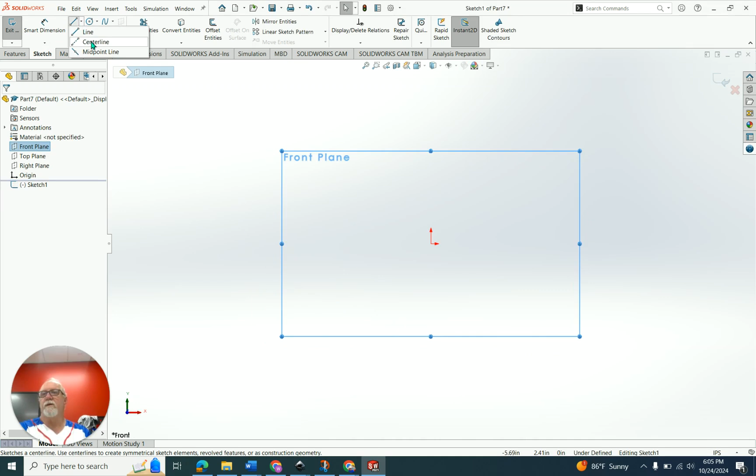I'm going to choose the corner rectangle and draw a box. I'm going to dimension my box to 3 inches by 3 inches.

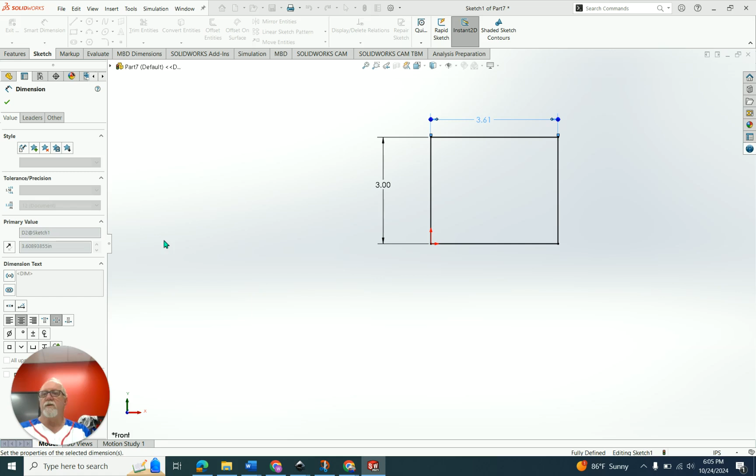One thing I would also like to do is make sure the box is composed of construction lines. So I'm going to select all the lines and choose 'for construction.' Now I have a reference for scale and size.

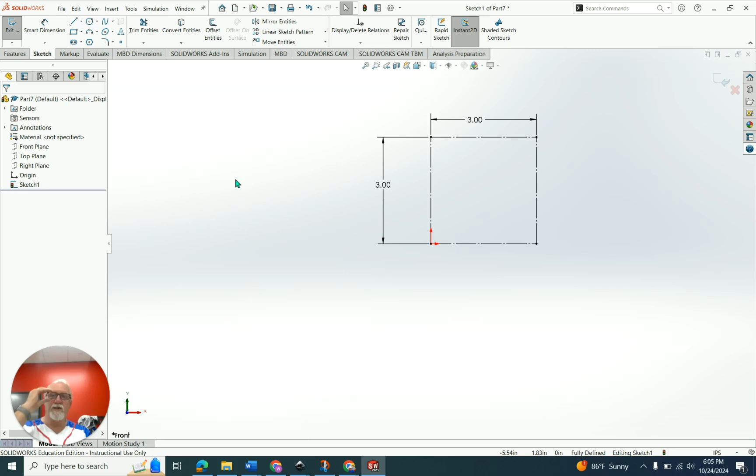I want my object to be 3 by 3. I go to Google and search for the Green Lantern logo.

I'm then going to use the Snip and Sketch tool from my computer. I'm going to choose New, then drag a box around my Green Lantern logo, and save it.

I'll remember the location. I'm saving it to the desktop right now, so I'm going to save it as Green Lantern JPEG. I'm going to go back to SolidWorks.

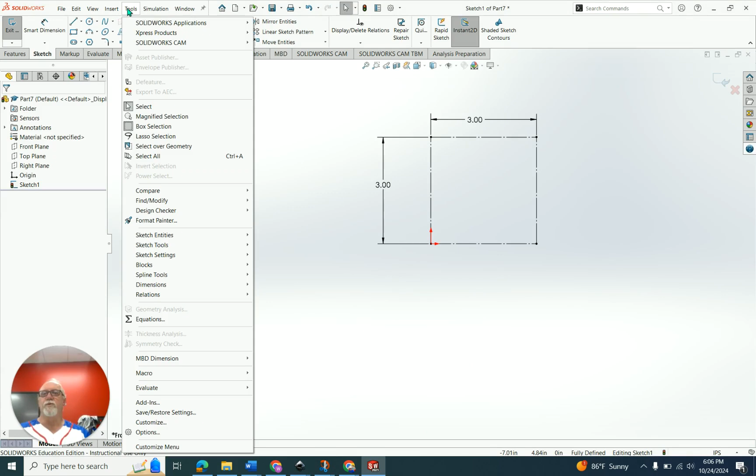I'm going to go to Tools, Sketch Tools, and Sketch Picture.

I'm going to navigate to my desktop, choose my Green Lantern logo, and click Open.

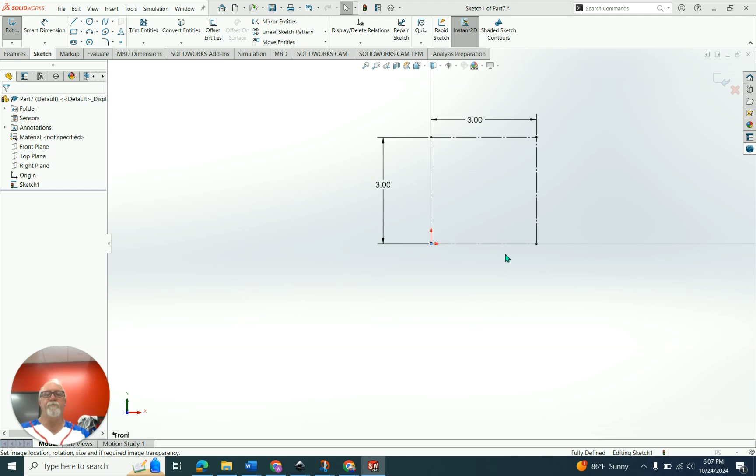It's going to open a large size scale view of it. I want to go to the property window on the left and choose Disable the Scale tool.

I'm going to drag my image down, make it smaller, and zoom in. I want to try to center that in my box.

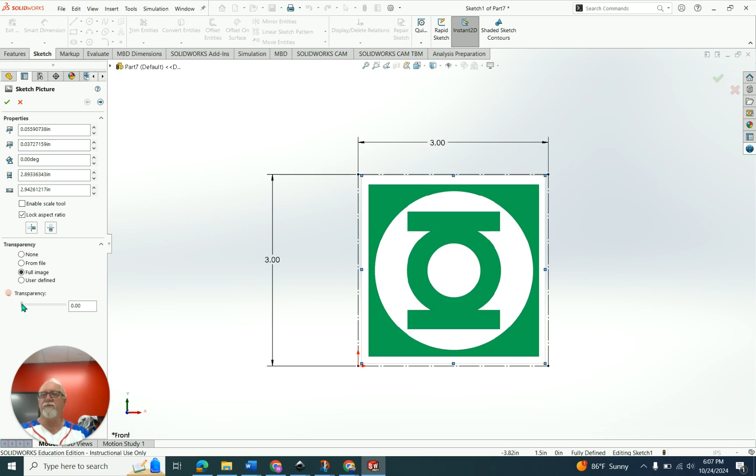I'm going to go to full image on the left and change the transparency to about 80% so I can still see it, but my lines won't be too dark to tell which ones they are.

I'm going to now close the sketch picture, and now I'm going to start to draw my sketch over my picture. There's my first circle.

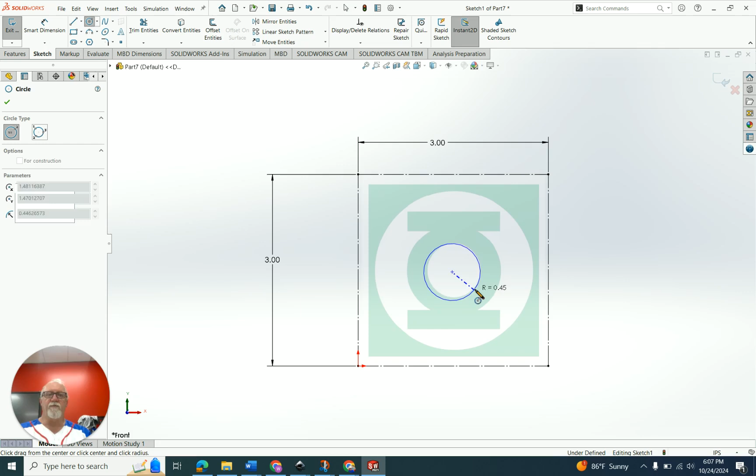The middle object, I'm going to turn and use this circle for that object. Then I'm going to have my outer circle image.

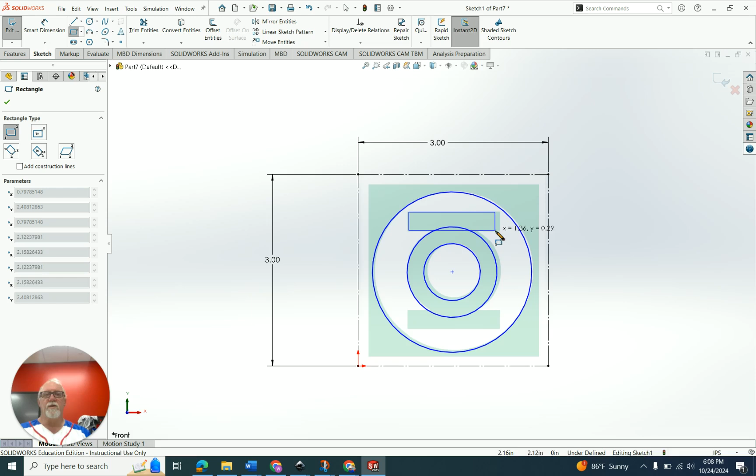Then I'm going to choose the rectangle tool. I'm going to draw a rectangle across there, and draw a rectangle across the bottom.

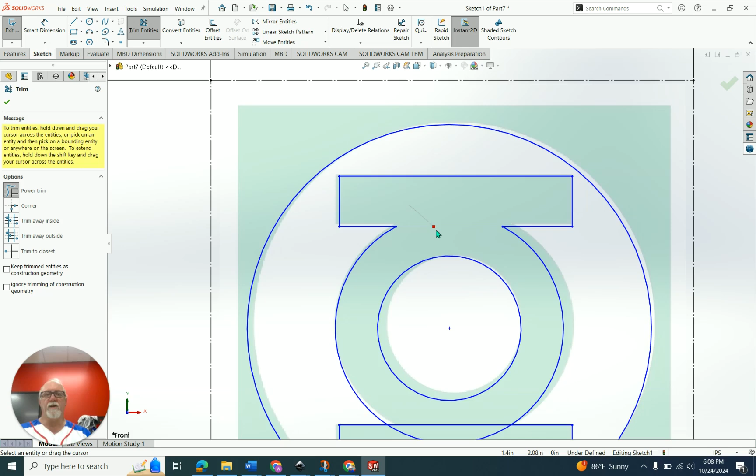I'm not going to worry about the outside green logo portion because I'm not going to worry about it. I'm going to go to Trim Entities, click and drag, and cut those images there.

I'm going to go back to my sketch picture, double click on it, and change the transparency to 0, or full transparency. And now I have my green logo.